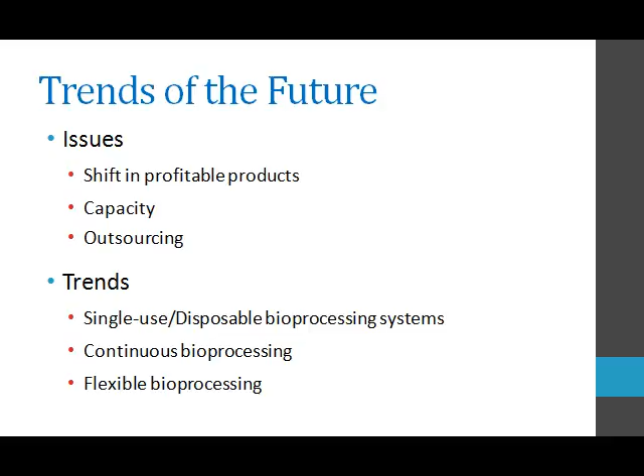So what do we see as future trends in biomanufacturing? Well, there will be an emphasis on economic outcomes, with more attention being paid to the economic value of a product as the determinant for funding and commercialization. We'll likely see shifting from blockbuster drugs to personalized health and wellness treatments.

We are already seeing externalization and collaboration, with more reliance on external partners, academia, industry consortia, and entrepreneurs for innovation, productivity, and global expansion. And lastly, globalization, the rapid expansion to emerging countries for scientific talent and new markets.

What is the strategic outlook for biomanufacturing? Well, first, there's the growth of the industry, which we could generally envision to be about 15% annually.

We'll see a shift to biologics, with already 20 new approved monoclonal antibodies and over 150 monoclonal antibodies currently under clinical trials. However, this could ultimately result in capacity shortages.

We can envision new technologies, better process yields, potent compounds, and better drug delivery systems. We can see smaller markets with fewer blockbuster drugs, more personalized medications, and targeted therapies toward genetic diagnostics.

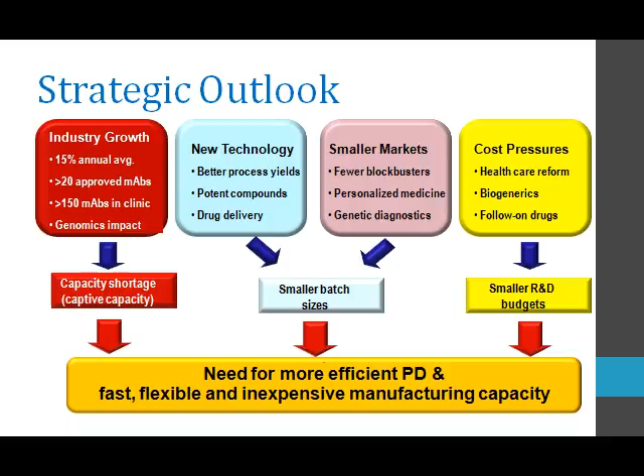So these four components together emphasize the need in the future for a more efficient process design with fast, flexible, and inexpensive manufacturing capacity. First, we'll discuss the shift in profitable products.

One of the most significant trends in biomanufacturing is the development of biosimilars. The reason for this is that the patents for most commercial biopharmaceuticals, in particular monoclonal antibodies, have expired or will be expiring within the next few years, with the first monoclonal antibody biosimilars already being approved for use in Europe.

The newly established regulatory pathways are also accelerating the development of biosimilars. In existing markets, biosimilar development will spread capacity among more players. In new and emerging markets, the biosimilar development potential will increase demand for manufacturing capacity. It is of note that in all major markets, there is now legislation in place for biosimilar development.

There are a number of large players who are now entering the biosimilar market. And there is a rising demand for smaller, localized manufacturing facilities, with many countries either encouraging, such as Brazil, or requiring, for example China, that these biosimilars be produced within the country.

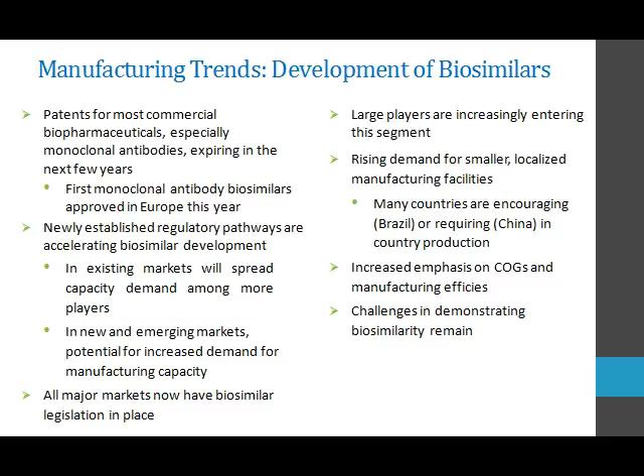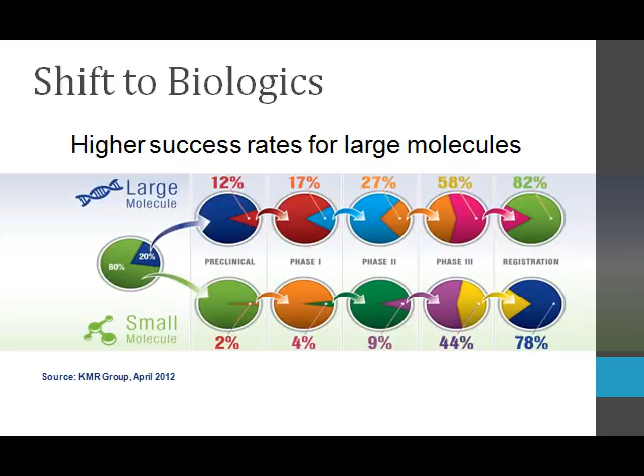As discussed in a previous lecture, this shift to biologics is in large part because of the higher success rates for the production of large molecule drugs as compared to small molecule drugs. This is also based on the fact that these are targeted therapies, so their specificity increases their likelihood of success.

A second issue for the future of biomanufacturing is capacity. It is of note that biotherapeutic or biopharmaceutical developers are twice as likely to experience significant capacity constraints versus contract manufacturing organizations. Again, this is a future trend which is fueling the increased use of these contract manufacturing organizations.

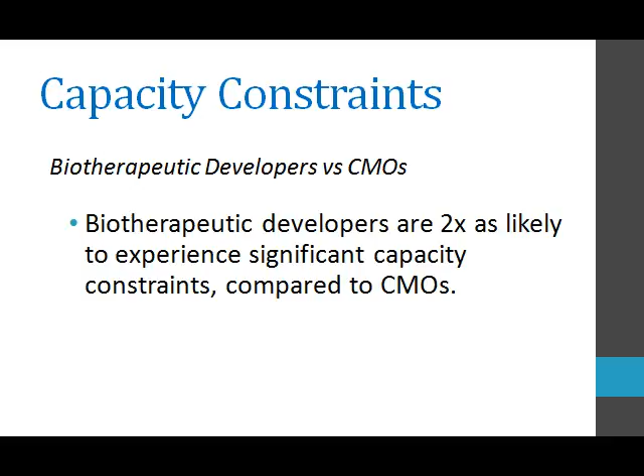What are some of the factors that are creating this capacity constraint? First, there is a lack of trained technical or production staff, a lack of financing for expansion of the manufacturing facilities, the physical capacity of equipment, the lack of trained scientific staff, the inability to optimize the production system or the quality control, or the inability to optimize yield.

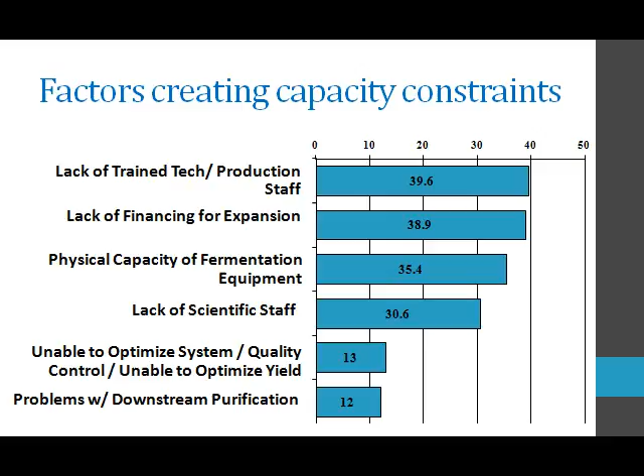There can also be problems with downstream purifications. After recognizing some of the factors which contribute to capacity constraints, for the future, how can we avoid these?

Well, first, optimizing cell culture systems to increase upstream performance. Now, as we've discussed before, optimizing the upstream performance can cause downstream bottlenecks. So it's also important to improve downstream purification performance.

One of the biggest issues with the biopharmaceutical industry are the regulatory processes. So in the future, we'll need to streamline the FDA regulatory process. It'll be essential to fund more early-stage scale-up production technologies. We'll need to increase training in the production areas. And last, develop cost-effective, disposable, single-use technologies.

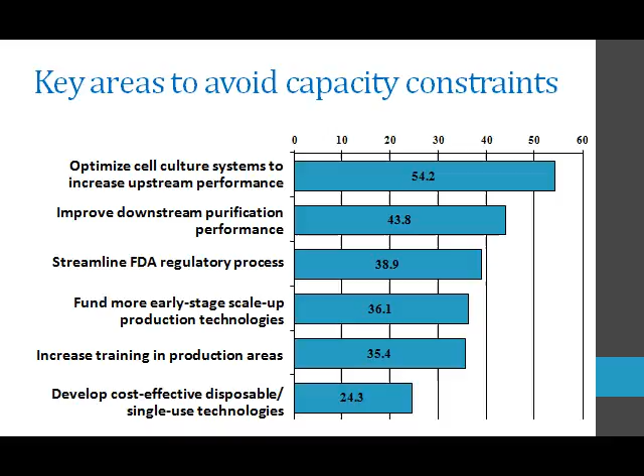The third issue in the future for biomanufacturing is outsourcing. In the future, as we see expanding demand for the products and the potential for constraints on capacity, how do we envision that these could be resolved? Well, a primary solution is outsourcing. This can lower cost, it can speed the time to the market, as well as decreasing the risk.

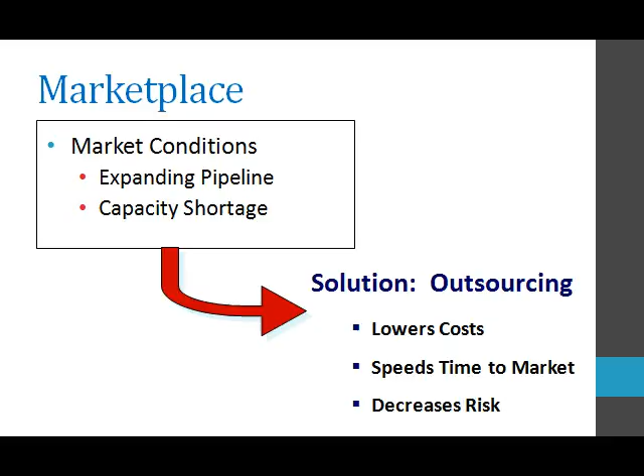So what kinds of biomanufacturing services can be outsourced? Well, in reality, virtually all services can, whether it's biomanufacturing facilities, process development, support services. By that we mean analytical processing, fill-finish processing, regulatory affairs services, as well as brokerage services.

And these can be successful because many of these contract organizations have client or customer relationships already in place. And with improved manufacturing process, this can lead to improved efficiency.

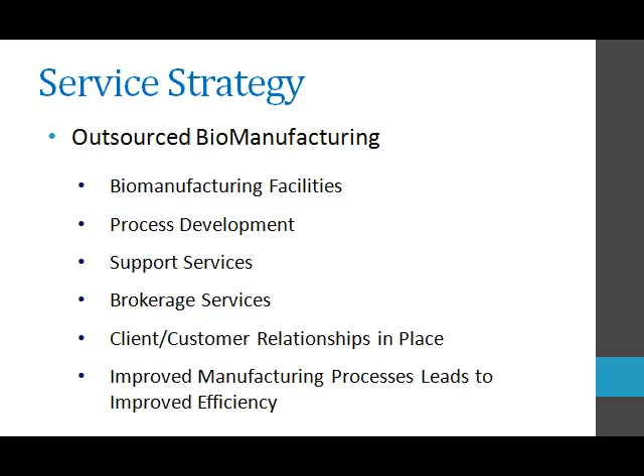So in the future, as we move to more outsourcing, what are some of the critical issues? Well, the contract manufacturing organization must establish a good working relationship with the biopharmaceutical company. And in some cases, this preferred service or trusted provider network is becoming a critical issue.

The CMO must have production platforms relevant to the product. The CMO must be able to stick to its schedule. They must have a demonstrated track record with products similar to the company's. And the CMO must demonstrate cost effectiveness.

So what are the future trends for outsourcing to contract manufacturing organizations globally? Well, if you look at the US and Europe, biopharmaceutical companies are likely or extremely likely to outsource some or all of their manufacturing to a contract manufacturing organization. In contrast, in South America, India, China, and the rest of Asia, they are unlikely or will not consider outsourcing their manufacturing to a contract manufacturing organization.

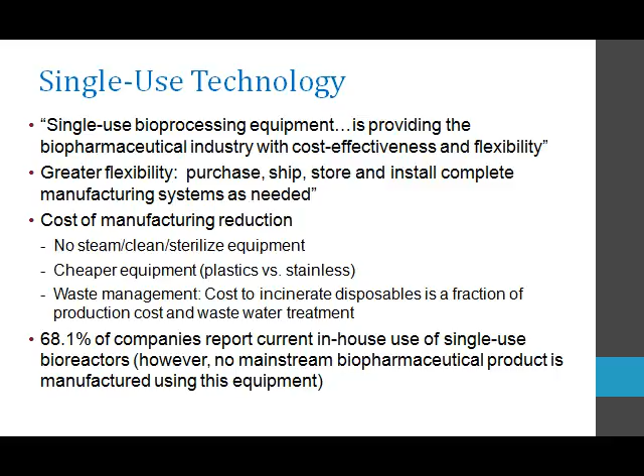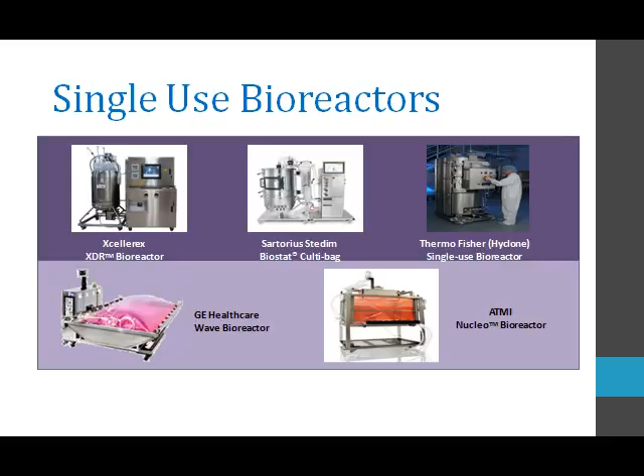Here we show a few examples of single-use bioreactors. And here we show several examples of downstream disposable or single-use systems, whether it's for centrifugation, chromatography skids, or filtration units.

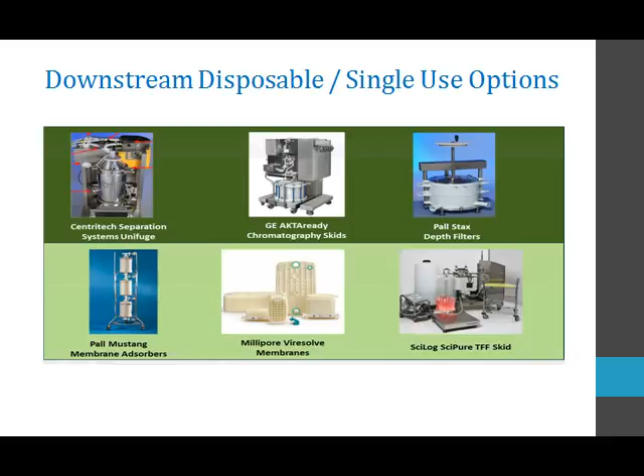So one can see that there are single-use options available across the entire manufacturing flow path. These provide lower cost and more efficient manufacturing.

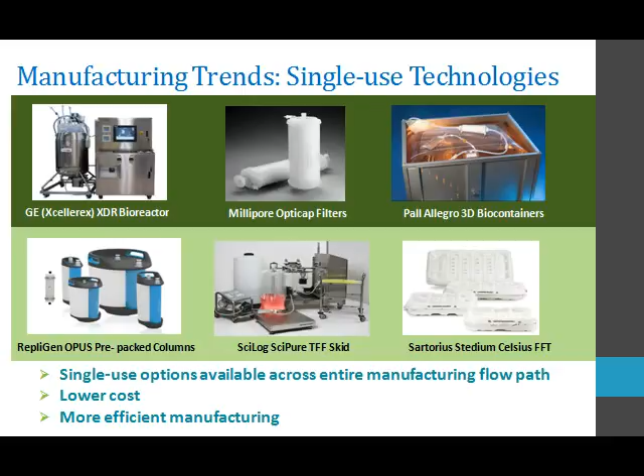The advantages of the disposables or single-use technologies are that the extensive use of disposables allows the production facility's manufacturing platform to operate at a lower cost and more efficiently. The additional advantages are there is no need for cleaning or sterilization. The engineering is simpler. The equipment lead time is less because these are simpler and cheaper to make.

The validation process becomes simpler. The quality and regulatory processes become simpler. The space required is less, and these are all less labor intensive.

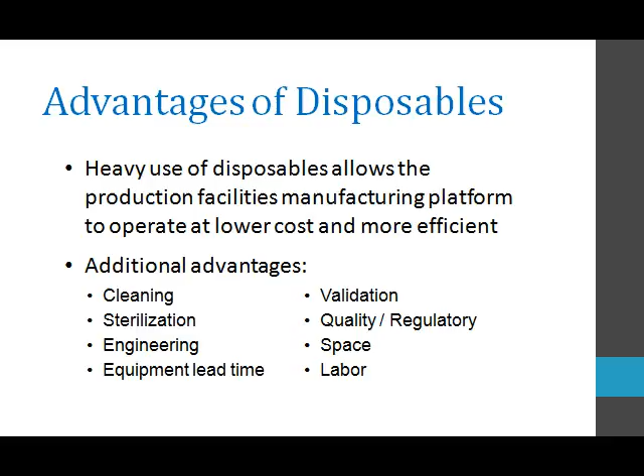Another trend for the future of biomanufacturing is continuous manufacturing. The biomanufacturing process can be either batch manufacturing or continuous manufacturing. Traditionally, batch manufacturing has been used. In this case, all of the materials are placed within the bioreactor at the beginning of the process, and at the end of the process they are discharged. In contrast, with continuous manufacturing, the material is simultaneously placed into the bioreactor and the product is withdrawn during the process.

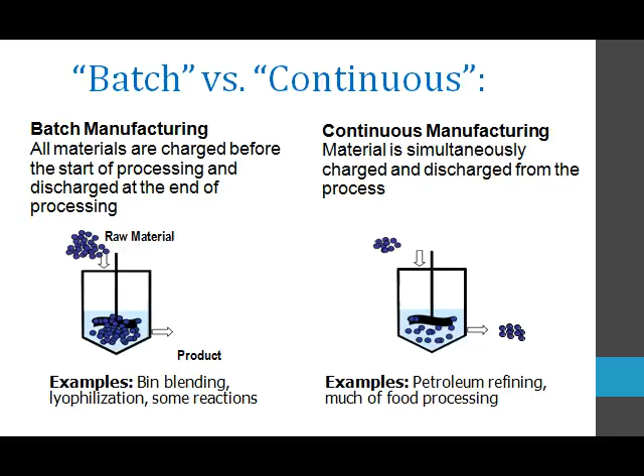There are numerous advantages to continuous manufacturing. First, integrated processing has fewer steps. There is no manual handling, resulting in increased safety and less variability, shorter processing times, and increased efficiency. There's smaller equipment and facilities needed.

This can lead to a more flexible operation, reduced inventory, lower capital cost, less work in process materials, and a smaller ecologic footprint.

Inline monitoring control for increased product assurance occurs in real time. This is amenable to real-time release testing approaches, and it consistently improves quality. So all of these have the potential for reducing the cost of manufacturing.

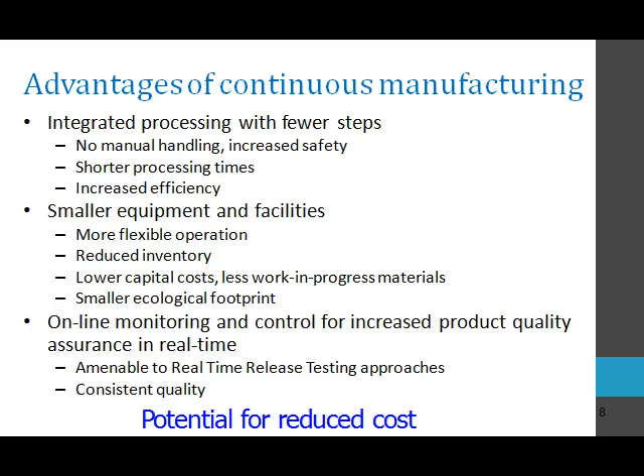Quality by design was discussed in our earlier lectures, but quality by design and continuous biomanufacturing are a perfect fit, as continuous biomanufacturing incorporates all of the concepts of quality by design.

There's a clear difference between batch manufacturing and continuous biomanufacturing in terms of the process analytical technologies. Continuous manufacturing lends itself to many inline real-time monitoring methods, while batch or semi-batch manufacturing's use of these process analytical technologies is more of an add-on.

Here, appropriate process analytical technologies are key. These all involve the various inline and real-time monitoring technologies. Risk-based approaches are enablers to rank quality attributes and control strategy elements during continuous manufacturing.

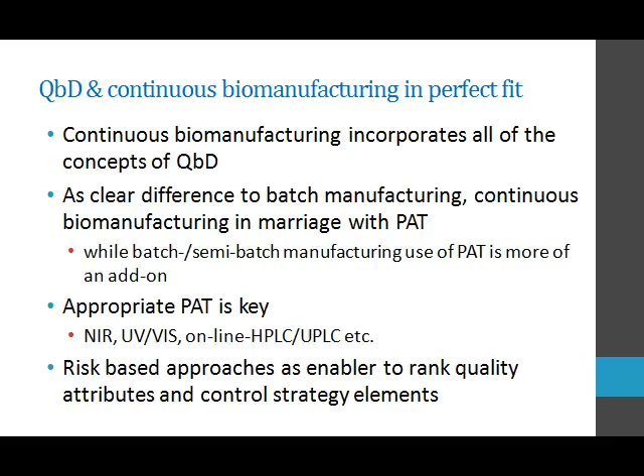The drivers leading to this future trend of continuous biomanufacturing include process and business drivers. It's important to recognize that continuous biomanufacturing has predictable performance. It's efficient, flexible, can be easily standardized, and can be universal. So across multiple sites, you can have exactly the same facilities.

One of the problems seen in batch manufacturing, if you look at the steady-state processing and quality control, is shown here, where the red line is variable. Whereas continuous manufacturing uses steady state for process and product quality, with reduced footprints and reduced issues or risks with technology transfer.

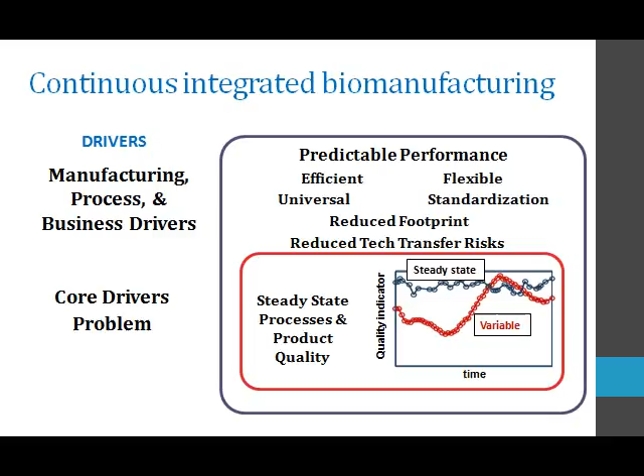When we generally think of continuous manufacturing, we tend to think of it within the actual manufacturing or upstream processing. But continuous manufacturing can also be used within the purification steps. Here we show an example of a continuous chromatography capture step, which has many benefits over batch chromatography in terms of a smaller facility footprint.

There's no harvesting or clarification tanks needed. Buffer and resin usage is reduced, and there's increased productivity. You can use dramatically smaller columns, up to 100-fold smaller, and this is very amenable to automation.

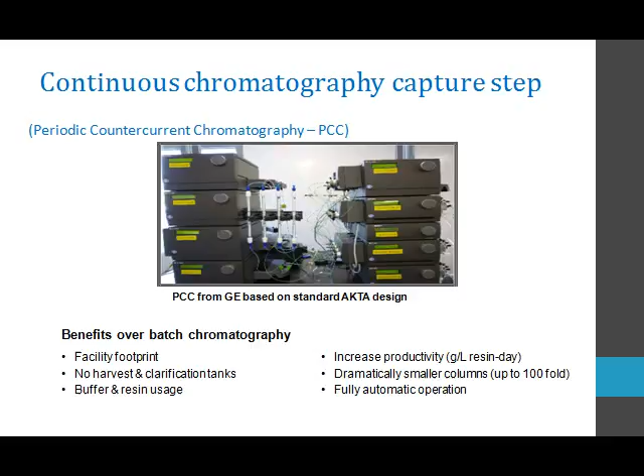Here's an example of the advantage of continuous processing. If one were attempting to purify 1 kilogram of clinical trial supply of monoclonal antibody, it could be achieved with less than 1 liter of protein A resin at a load flow rate of less than 200 mLs per minute, with a total processing time of less than 1 week.

This is the potential for continuous processing in biopharmaceutical manufacturing. This means smaller facilities, which yields savings from having to raise less capital and spend less capital. It provides a faster, more predictable supply, and improved process control.

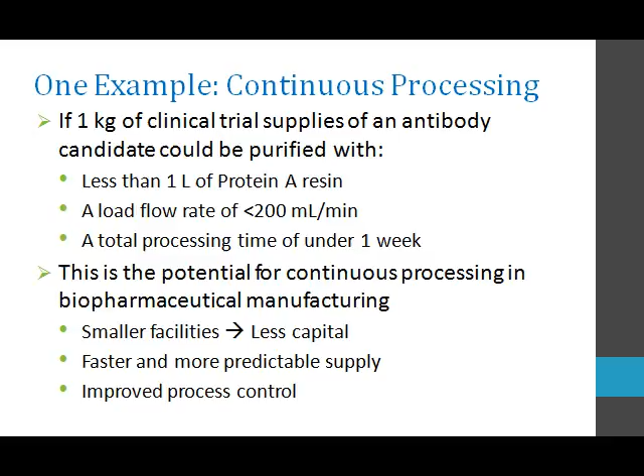Another future trend for biomanufacturing is flexible facilities. So what are the requirements of these biomanufacturing facilities of the future? Well, they need to be designed to minimize capital cost. The design needs to allow rapid construction. They need to handle a wide range of processes, be flexible, and quickly reconfigured. They have to ensure a high level of product quality and minimize labor and operation cost.

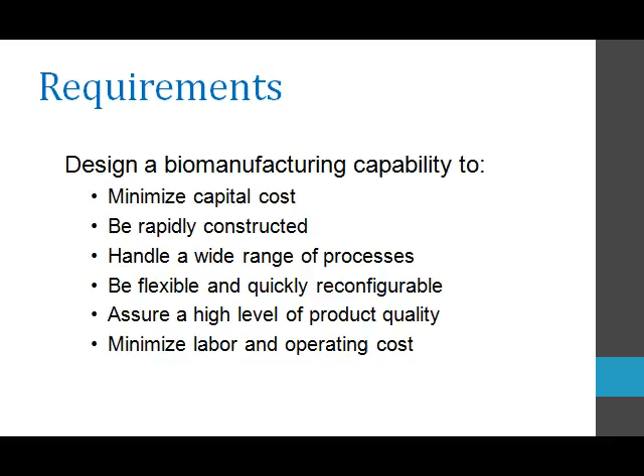As the biopharmaceutical marketplace changes and evolves and emerging markets come online, the facilities of the future need to be smaller and more focused on specific markets. Their flexibility must increase, which can be enhanced with the use of disposables. Their efficiency must increase, and downstream processing must improve. These new facilities need to be more nimble, standardized, and modular.

They need to utilize platform processes and simpler processes that are less unique to a specific product. They need to incorporate appropriate and enhanced automation. However, they need to balance flexibility with consistency, and this can be achieved in large part by the use of single-use or disposable processing.

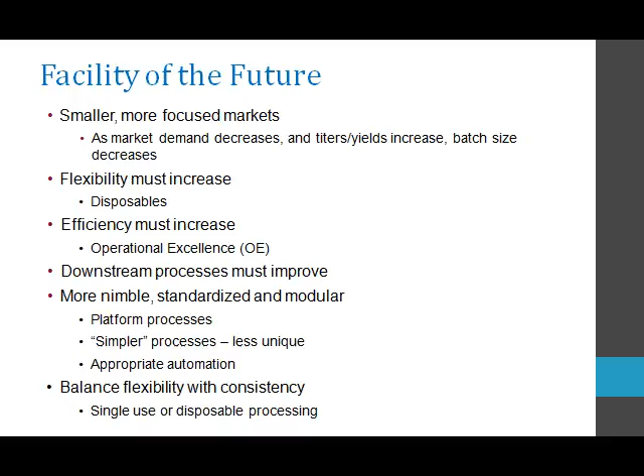These biomanufacturing facilities of the future need to use standardized designs based on standard platform processes. They need to be readily adaptable to alternative processes and product types, with good manufacturing areas built using modular construction. They need to incorporate maximum use of disposable and single-use technologies, such as disposable bags for media, buffer, and product storage, single-use bioreactors for upstream processing, as well as pre-packed columns and membrane adsorbers for downstream processing. This can result in lower capital investment and lower operating cost.

You can minimize cost by minimizing the need for re-engineering. You can maximize flexibility by allowing for easy reconfiguration of your facility using modular designs. This will result in a 25% lower capital investment cost versus a traditional stainless steel facility. In addition to reduced capital cost, operating costs can be decreased by more than 23% versus a traditional stainless steel facility.

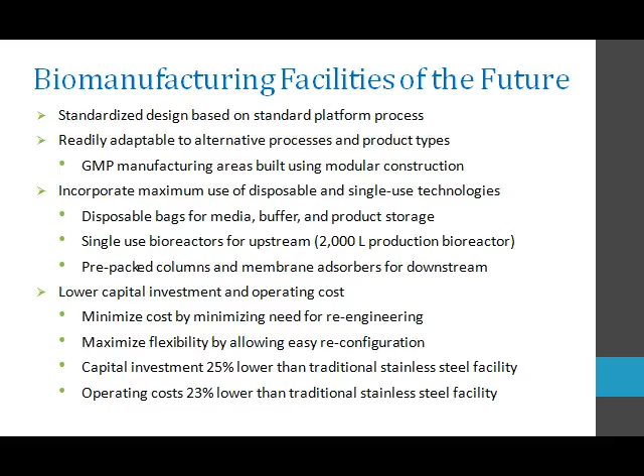Currently, conventional biopharmaceutical plants are large, single-product dedicated plants built for manufacturing blockbuster drugs. They tend to be inflexible with a fixed pipeline and are extremely costly to modify. They produce a few products, but at very high volumes.

In contrast, the biotech or biopharmaceutical plants of the future will be multi-product platforms with lower capital cost and lower operating cost. They will be built on the use of disposable or single-use technologies. The modular design allows them to be flexible. These plants will produce multiple products, but at smaller volumes.

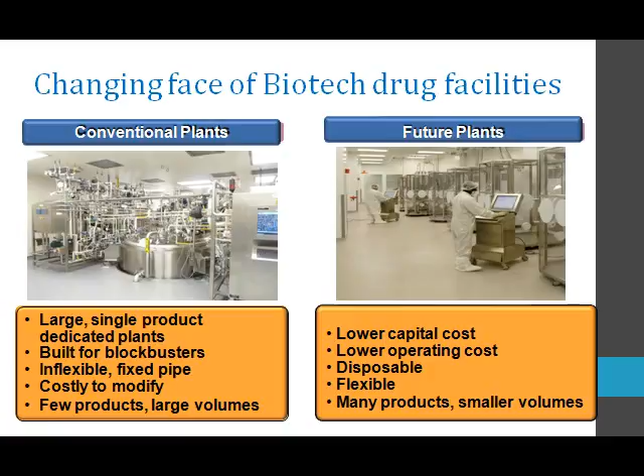So in summary, the future biopharmaceutical trends are: we expect to see more global biopharmaceutical facilities, more biologic products often targeting smaller markets, a greater use of continuous processing including both upstream and downstream processing, and flexible facilities for multi-product production.

They will be modular facilities, enabling new technologies and repurposed spaces. There'll be more efficient bioprocessing, with yields and titers continuing to increase. There'll be use of more high-tech expression systems and engineering advances. Most importantly, more automation, monitoring, and process control, all of which decreases variability and increases the most important factor: product quality.